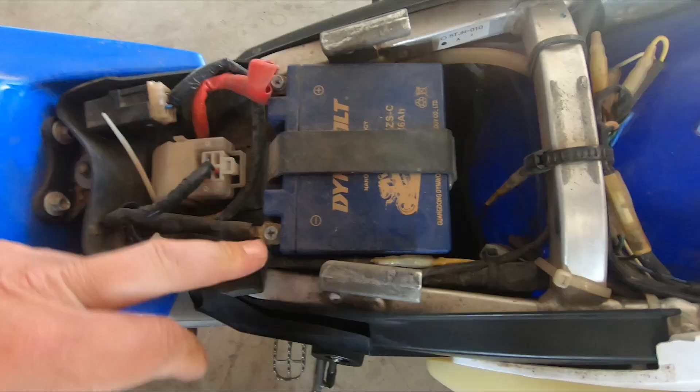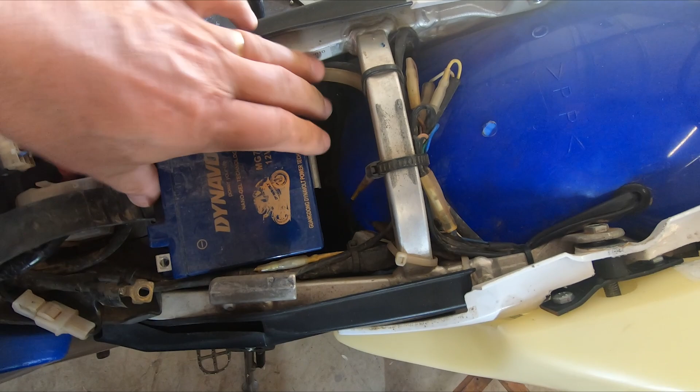And there's what I'm after - there's the lead acid battery I'm going to pull out. Have a look at the difference in size between those 2 batteries. There's the original lead acid, and there's the lithium. And the lithium battery is actually higher cold cranking amps than this little sucker.

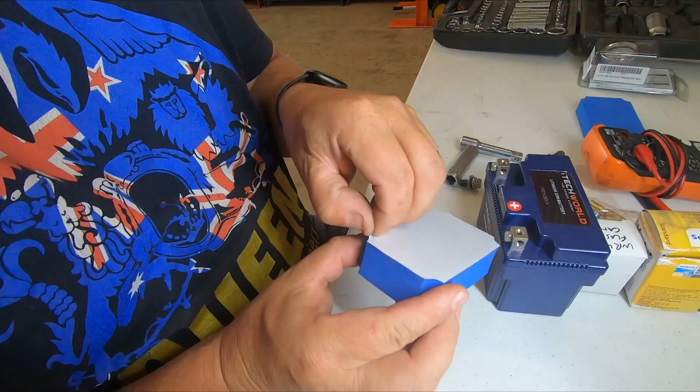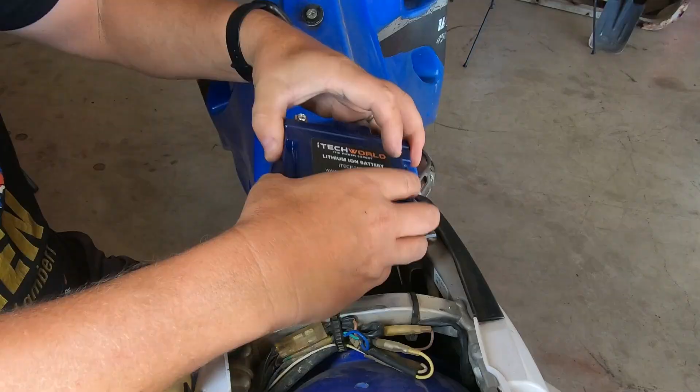What iTech do give you is these little pads to build out the battery, and when you do that, they're an identical size. So that's cool, that'll fit in the bike, no dramas with that little pad. Just like that, battery spacer fitted. Now we get our lithium battery with our little packer. Look at that, easy peasy. That's our positive terminal, negative terminal.

Done. Well, that was a pretty simple swap out. While I was in here, I decided to pull off the little fuse panel and just clean those contacts up a little bit and check each one of these fuses, hit them with a bit of contact cleaner.

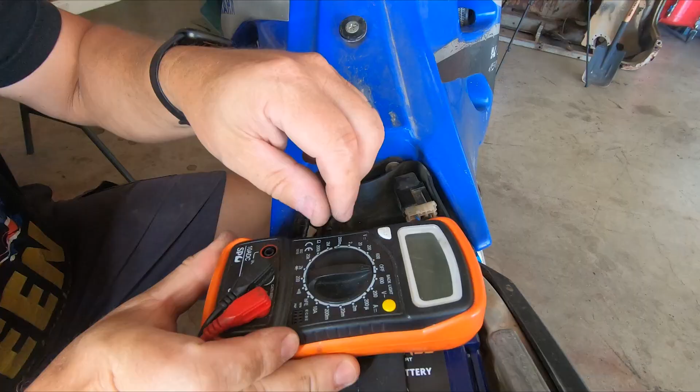All right, I got my multimeter here. I'll just put it on resistance, put it on the squealer, and test each one of these fuses. That one's good, that one's good.

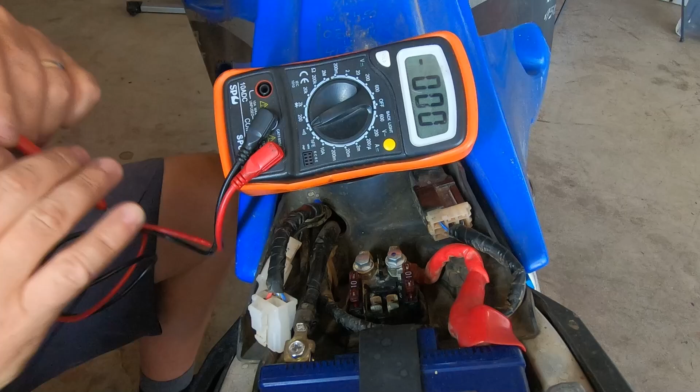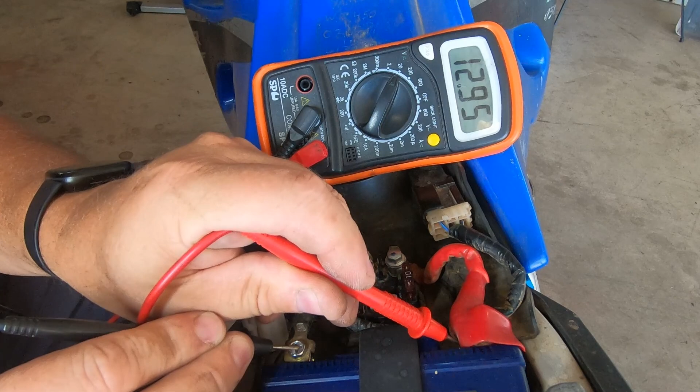While I'm here, I might as well test the voltage of this iTech battery. It should be 13 or close to it - it's brand spankers. 12.95, excellent. Okay, let me see how this thing turns over for starters.

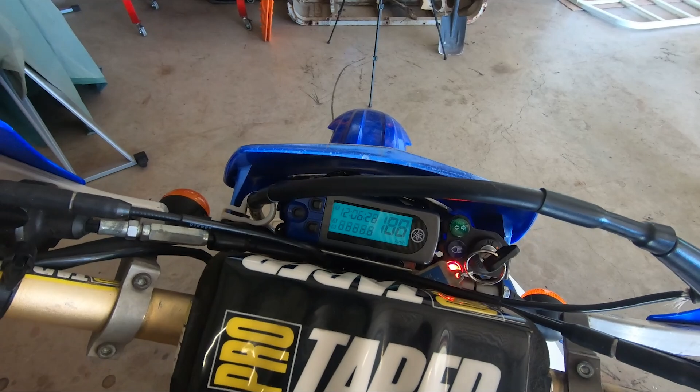Man, what a difference. All right, let's see what voltage we got going in - 13.05 at idle.

Well, after running that voltmeter on the battery, I had a look at the manual, and the specifications said that charging system should be running between 14 and 15 volts. So I thought there might be something a little bit suspicious there. I dropped the old battery back in, which was sitting at 12.3 volts, started it up, and it stayed at 12.3. So I've got a charging issue on this bike somewhere.

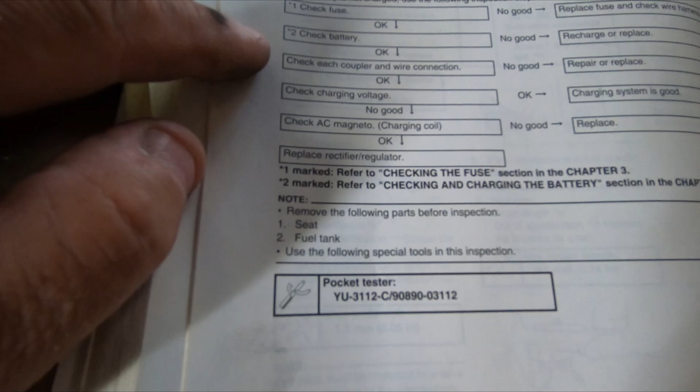All right, here's the charging system checks. First of all, check the fuse - I've done that, that's good. Check the battery - it's a brand spanker, so that's all good. Check each coupler and wire connection - I haven't done that yet, but I will. Check the charge voltage - that is no good. Check the AC magneto, and if that's no good, replace the rectifier.

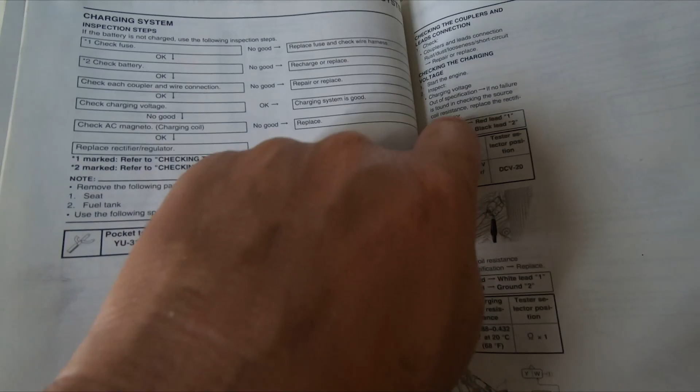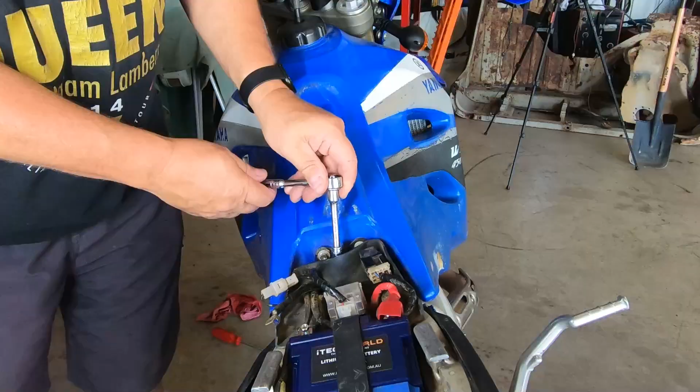And there's a procedure here for checking the AC magneto. Unfortunately for me to do that, I've got to pull the tank off, so that's where I'm going to next. So you got this big ass tank, and it's got 2 puny little 8mm bolts holding it on.

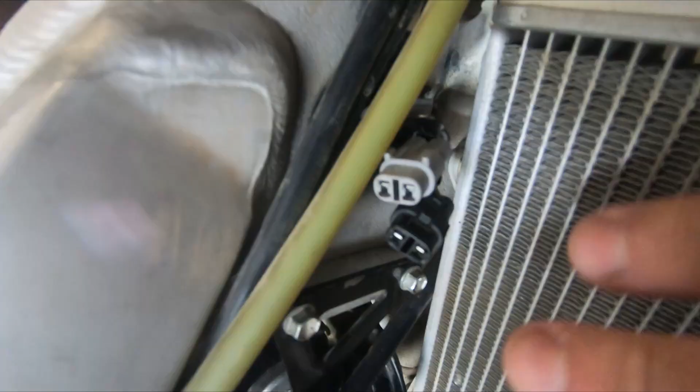Well, after a little bit of diagnostics, which basically involved testing the resistance at these 2 plugs, I have found out that my stator, located behind this cover, is dead. A stator is basically an alternator for a battery - it's the item that uses a moving magnetic field to create the electricity and charge for the bike. So I've got to pull this cover off and change that stator out.

To do that, the first thing I've got to do is drain the oil out of the bike. All right, the oil drain plug on these WRs is right there. I'll undo the filler plug so it doesn't gloop. Now I'll take this sucker off and try not to drop it into the drip tray.

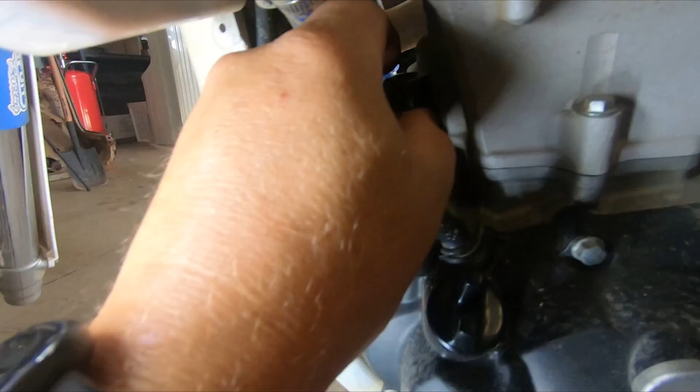Sweet. That seems to be running pretty slow, so let me take the dipstick out and let a little bit of air in that way.

Much better. Yamaha couldn't have extended that plug by another 2 or 3 millimeters just to clear this chassis, because when it drains, it runs in behind this weld and gets soaked inside of the chassis and then dribbles out here. I guess that's the difference between engineers and mechanics.

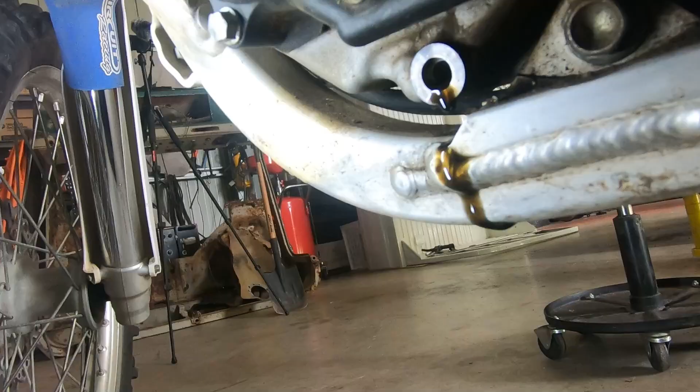That's a weird kind of phenomenon. A couple of these drops, if you watch them, they're actually not hitting the frame, they're flicking out. There's no wind to be blowing them. It's almost like a surface tension or a static electricity or something. It's really weird.

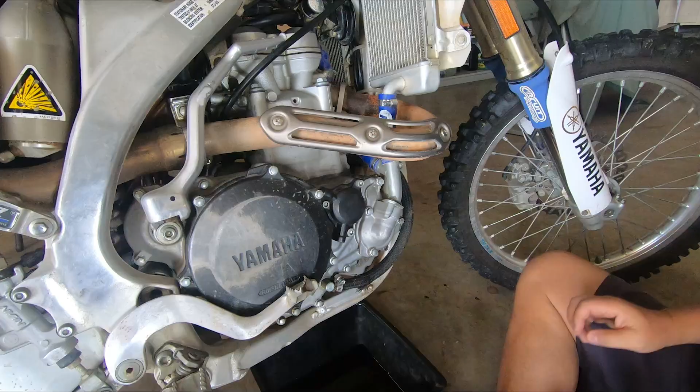I've never been more fascinated with an oil change. Now over on this side of the bike, behind this cover, is the oil filter.

My recollection of this is that all 3 of these bolts are different lengths, so you got to make sure you get the right bolt in the right hole. And my recollection was correct. There's just an O-ring here that seals it, and a couple of O-rings here where there's some oil galleries. And there's our oil filter.

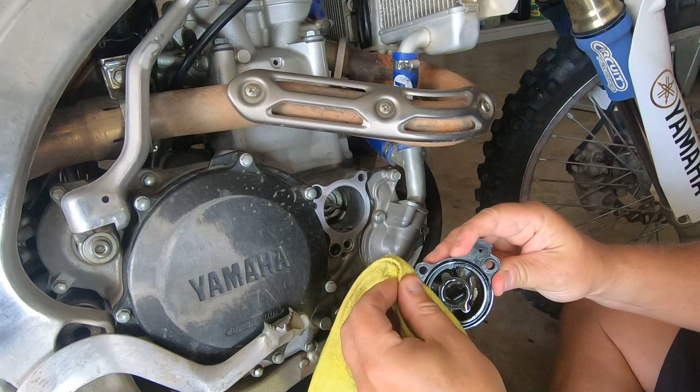Now I'll sop up the oil out of there as best I can, clean off that mating face, clean off the mating face on the cap. There's our new oil filter. Hello, little guy. Got a bit of oil on that mating surface and a little bit on that mating surface. Now you can't put this on backwards because there's a blank there. Won't fit, has to go that way.

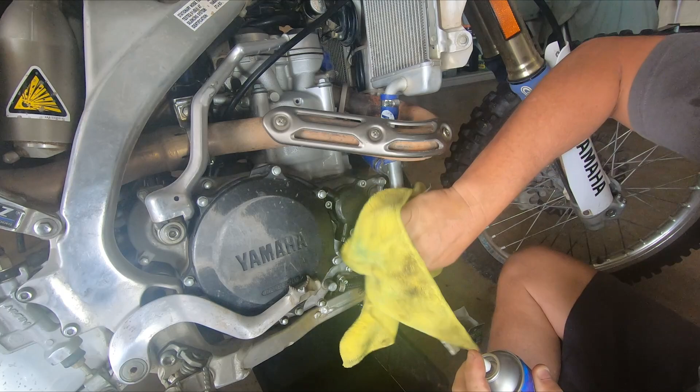Hit that with a pile of brake cleaner so it's nice and cleaned off, so if I've got a leak later on down the track, I can see it and it's not masked by the oil that I've already spilt when I was doing the change.

Now I'm back over the other side of the bike again, and I'll put this drain plug back in. There, that's pretty nice and clean.

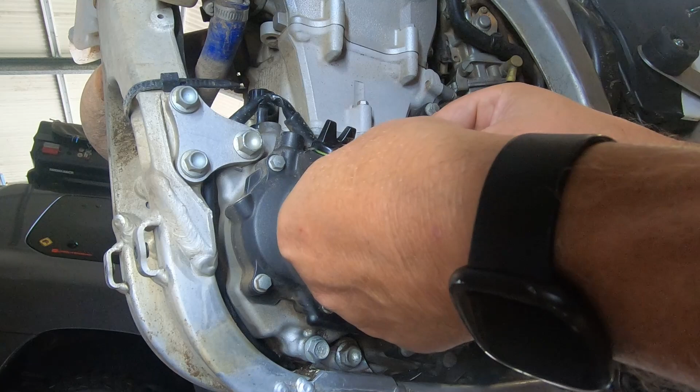I've got to leave this crankcase empty, but I do not want to forget to put oil in that when I'm finished. So I'm putting this little yellow reminder tag here to tell me, don't forget to fill me. It's pretty sad when you get to my age and you got to put these little reminders down for yourself. Got to accept my limitations and compensate.

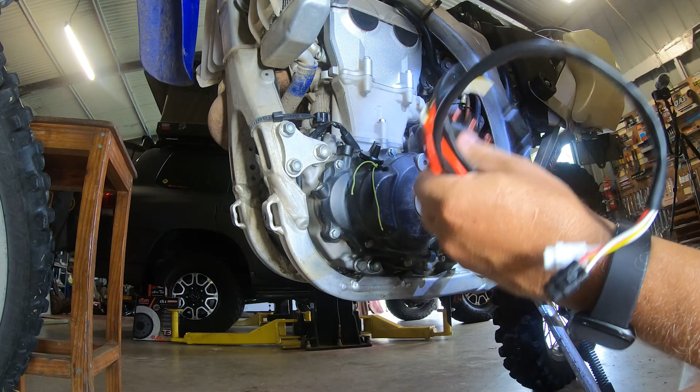The reason I need to do that is it's going to interfere with this cover here. I might just mark that spline so that I know where I took it off so I can put it back on the exact same spot.

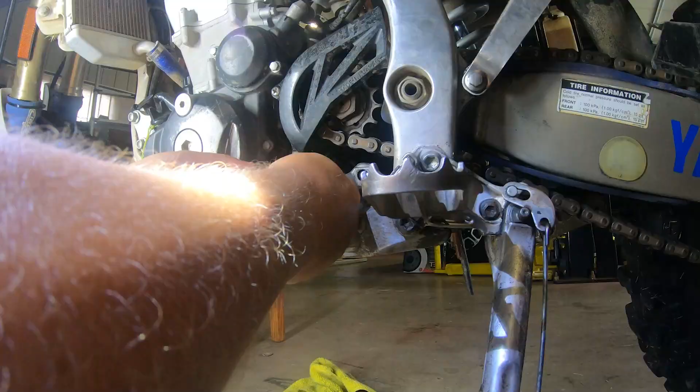Excellent. Now the next thing I've got to do is pull off this little breather. Now I pull the starter cover off.

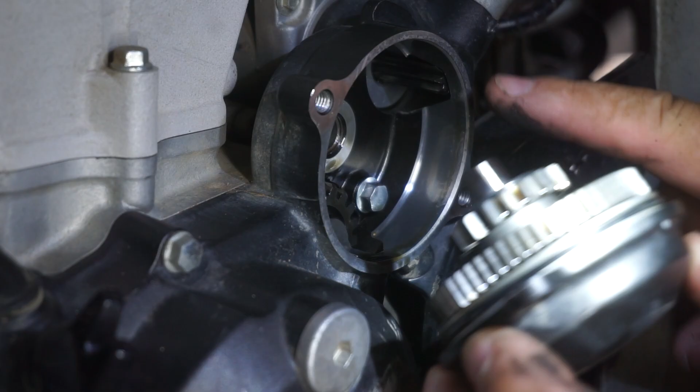So I guess that's just an intermediate gear. There's the starter gear there. Then you got this thing, and then you've got the gears here in the actual engine itself. So I guess the starter gear engages this guy, spins him around, and he turns him.

Cool. Okay, now I pull the rest of these bolts off. And they're not all the same length. So that one's the shortest one, and that guy there is the longest one.

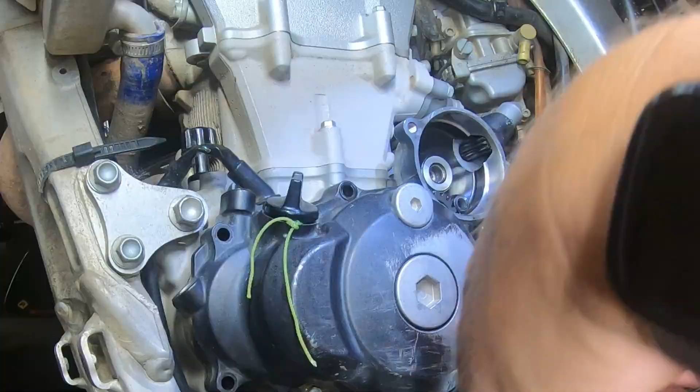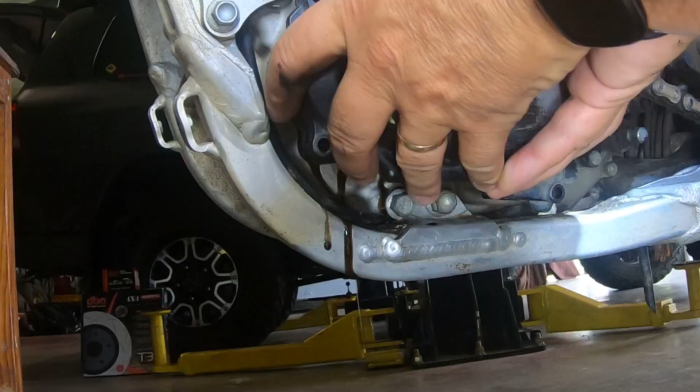So I'll just need to remember that, which I won't. So I'll mark them, put an L for that one, put an S for that one. Long and short for the geniuses out there. Look at that, I actually had a rag that was pretty close to being right in the right spot.

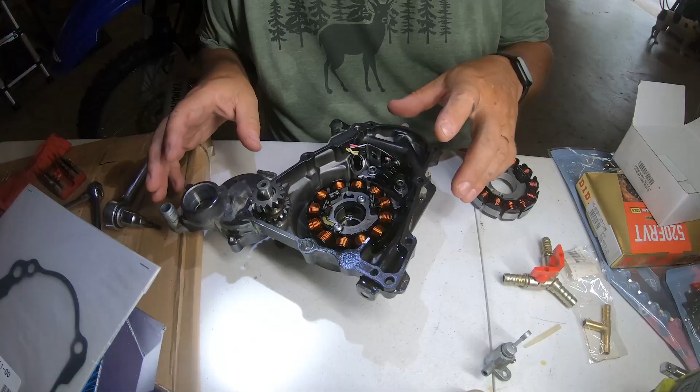There's what we're chasing right there, Mr. Stator. All right, now a couple of precautionary things before I rip this apart.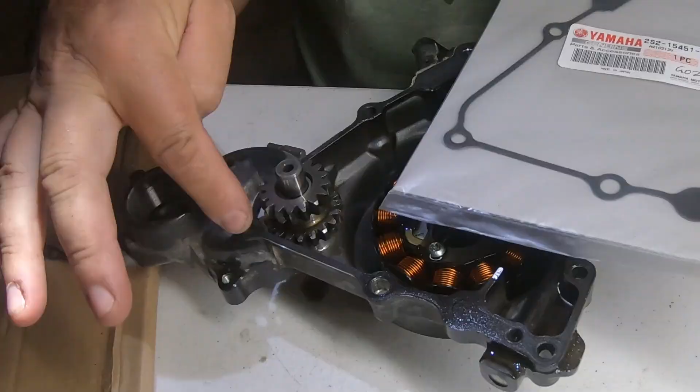There's my gasket that I got from Yamaha, there's the part number. I just want to make sure that that's going to fit. So that's got a little dog leg there, which is there, that runs around there. We've got a little flat square thing, which is that, and another tab there. Yep, that's the right gasket.

So I can pull that gasket off. It feels like it's got a bit of, it's like a steel reinforced gasket.

Next I'll check out the stator. Now I've already checked out these two plugs which match on the bike. So if I'm looking at this, it's got a little steel tab there, that's got that there. There are two plugs here, two here, big one here, big one there. That all looks good, same diameter.

That's our magnetic pickup, that looks about the same. And that's the little rubber plug that goes right there. So I'm going to call that a win in terms of a matchup. Not going to call it a win in terms of a solution yet.

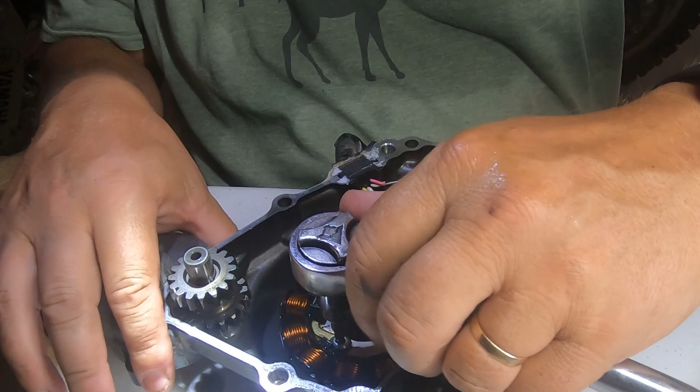Now there's two Torx bits holding that on, and those are T25s. And they're not held in there very tightly either.

I'm looking at those two Torx bolts. They're exactly the same. Now let's get this magnetic pickup off. That is held in place with two 5mm Allen head screws, and those two are identical lengths as well, so you can't mix them up.

Now I'd imagine this plug just levers out. Yes, we got a couple of pieces here. So we've got the magnetic pickup, which is underneath, and then we've got this little, must be a wire guard, which sits over top. Now the wire is fed between these two posts and goes directly in there.

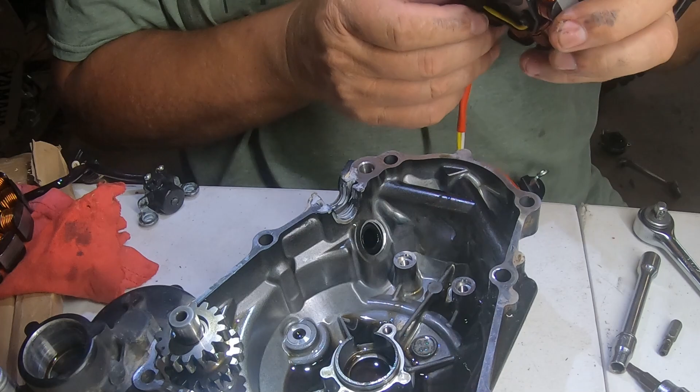So while that's all still fresh in my head, we'll get the new one straight away. That gets fed around the post like that. Then our magnetic pickup goes on those two posts, and then this wire protector.

Need hands of a 12-year-old for this. It's just running these Allen bolts down to hold it all in place.

Now let's bolt this stator in place. Okay, everything's sitting in place. Now the last thing I need to deal with is this little rubber plug which sits in there.

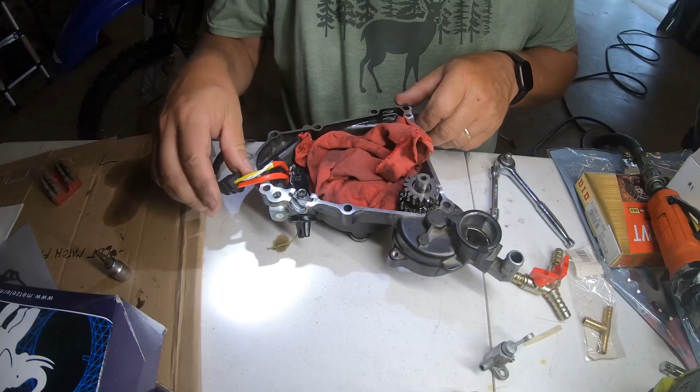But it looks like we've got some silicone on there, so I'm going to clean that up. I'm going to put a little bit of silicone on there myself as well. Now I put a rag in there so that I don't get crap sprayed everywhere. I've got a teeny tiny wire brush on my die grinder. I got it rotating so it's spinning all the stuff out that way, not in towards the cover.

Now I've got everything cleaned up. I'll run these bolts down tight now.

Now this little half moon sucker, I can see that giving me a little bit of grief because it sits a little bit proud of the mating face here, and the gasket has to sit over top of it.

Small amount on that surface, and then a small amount on the surface of the rubber plug itself. Now I will put a little small amount of sealant just on either side of that half moon because it is sitting a little bit proud of that gasket. I'll put a little bit of sealant on the top of that half moon where the gasket's going to sit up against it flush, like so.

Okay, I think we're ready to take that over to the bike now and fit her up. Okay, we'll put our gasket in place. There's a little O-ring there that the starter cover mates up against. I'll just put a little bit of oil on there to help facilitate assembly.

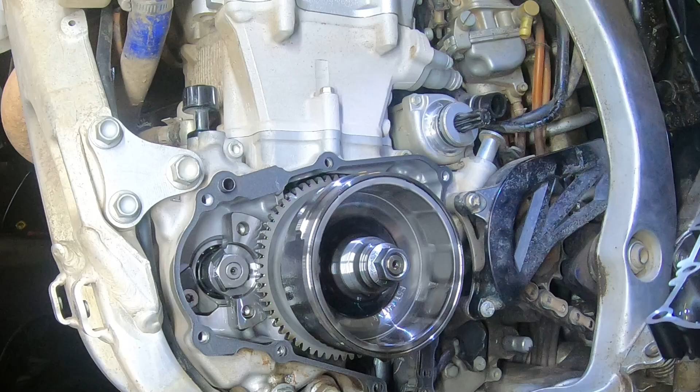Okie dokie, here we go. And then we've got locating dowels for the case itself. So how hard could this be, right? Short one goes there, and the long one goes here, and all the rest are the same size.

Okay, I have the starter cover in place. I've obviously got this cover completely put on. Now I'll put the shifter back on, top it up with oil, and before I route these plugs, I'll just plug them straight in, fire the bike up, and see whether we've got some charging happening.

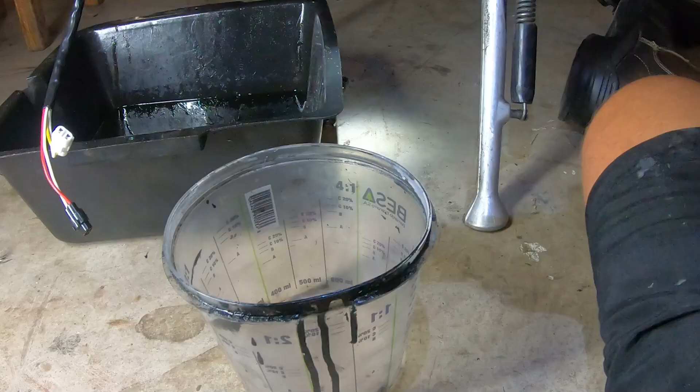Now I know the bike takes about 1.2 liters, so I'm going to actually measure that exact amount out, and then I'll dip it once I get the thing started, because you've got to actually dip it in the upright position.

Okay, it's the following morning, and it's mercifully cool in the shed here. It's probably only about 20 degrees. Got my side cover on. All the oil's cleaned off, so I'll be able to tell whether we got a leak there.

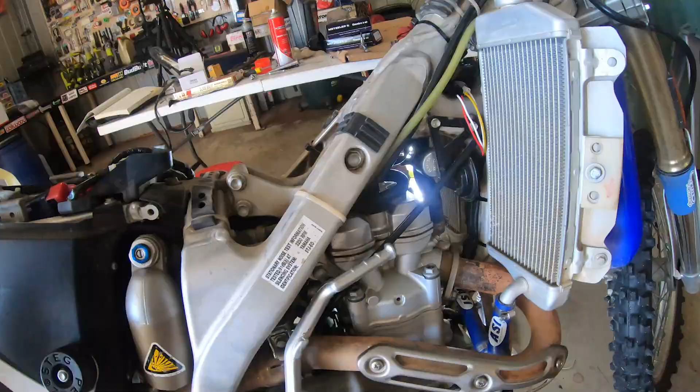I've topped up the oil with 1.2 liters. I've zip tied our cable in place. These are the two plugs for the stator. They're now plugged in. Now I'm just going to hop on the bike and kick it over without turning the ignition on, just to make sure that all the gears are meshing properly and that I haven't done something wrong behind that side cover where I might have one metal component contacting another in a bad way.

Good. No metal-to-metal contact there. Now I'm gonna set this fuel tank on just temporarily so that I can kick this thing in the guts and see whether our charge issue has been sorted out.

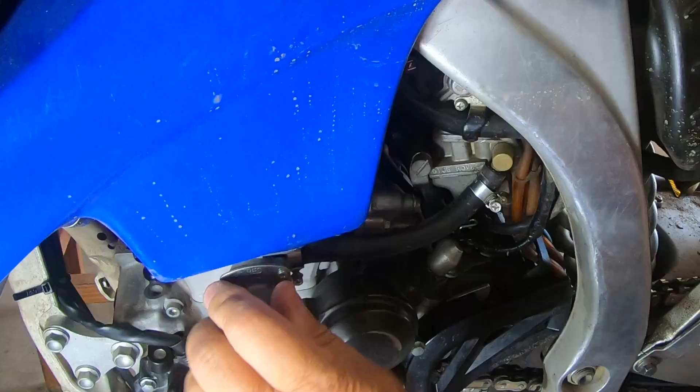You gonna leak on me without that clamp on there? It doesn't look like it. All right, moment of truth. Let's see whether this thing's charging.

Well, that isn't what I wanted to see. I was looking for between 14 and 15 volts. So I thought to myself, you've got a brand new lithium battery in there. Maybe the stator is reading that battery is full and just doesn't need to be charging it. So I'll put my old battery back in the bike, fire it up, and I'll see whether that changes the charging conditions at all. Fingers crossed, because if that doesn't work, I don't know where to go next.

All right, my old battery has got 12.89 volts in it. Let's kick this bike in the guts.

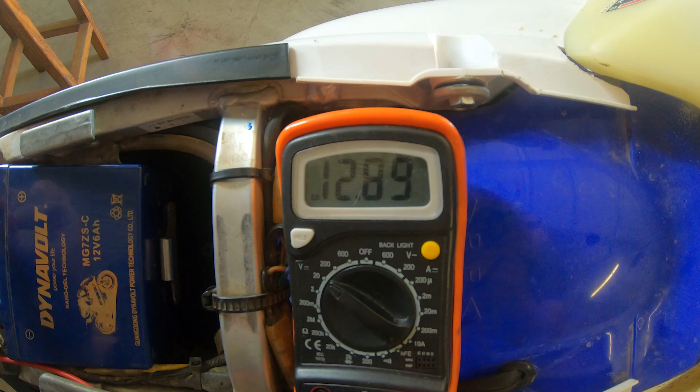Well, that's good to see. Obviously that lithium battery was completely topped up and the charging system was saying you don't need any more. We'll swap the lithium back in, call the charging system sorted, and move on to the next thing.

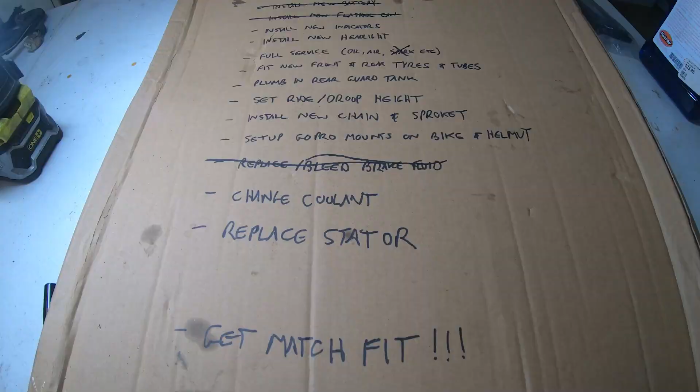Now, what was that next thing? Oh yeah, check the list. Now it's time to share in the wonderful experience of crossing something off the list. Did you feel that endorphin hit?

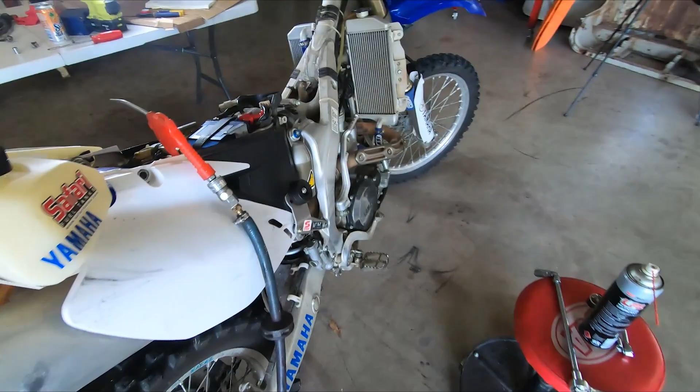You missed it? Let's try it again. Oh yeah, baby, now I've got no indicators. One reason is that one's melted off because of the tailpipe. But the second reason is the flasher can on these things just gets blasted to pieces with all the bumps and jumps you're doing. I don't know how many flasher cans I've replaced on this thing, but a crap load. Anyway, it's behind there, I'm going to dig that out and replace it.

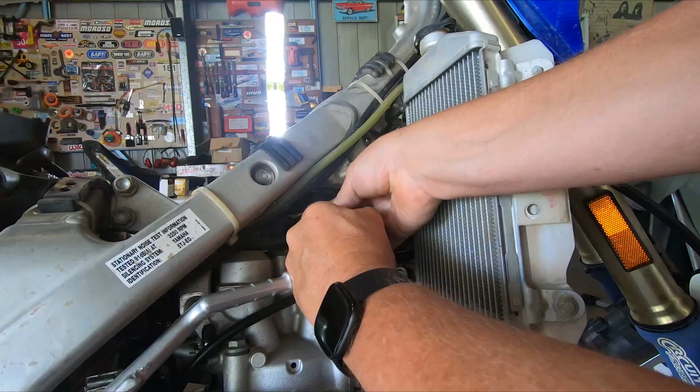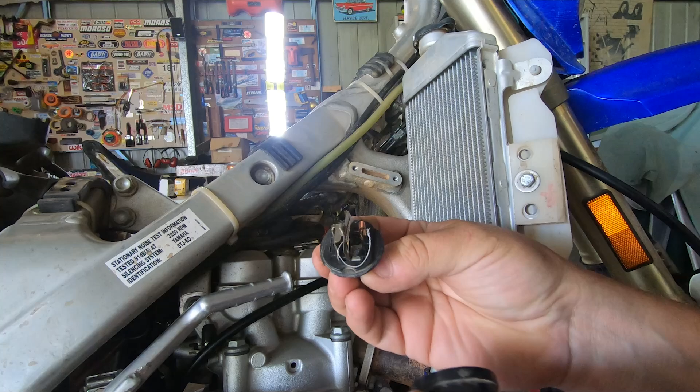And that's what this little flasher relay looks like. It's got such tiny little wires and little bits and pieces that they just get smashed to bits and stop working. Not that I'm going to be using the indicators out in the middle of the Simpson, but anyway.

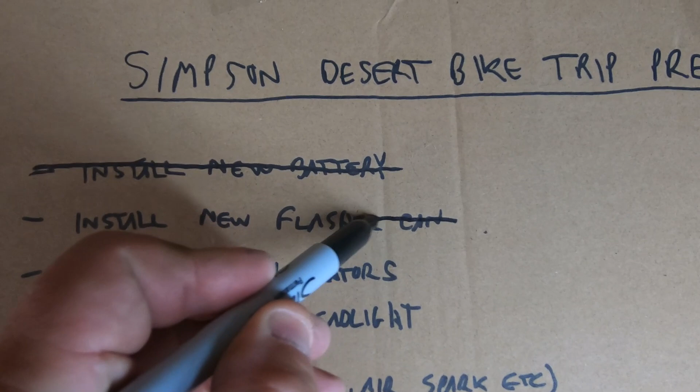Now to bleed the brakes. And that's what I'm chasing right there, that brake bleeder screw. Okay, got a little bit of hose, we'll pop it on the bleeder. I got a little container to catch the brake fluid in.

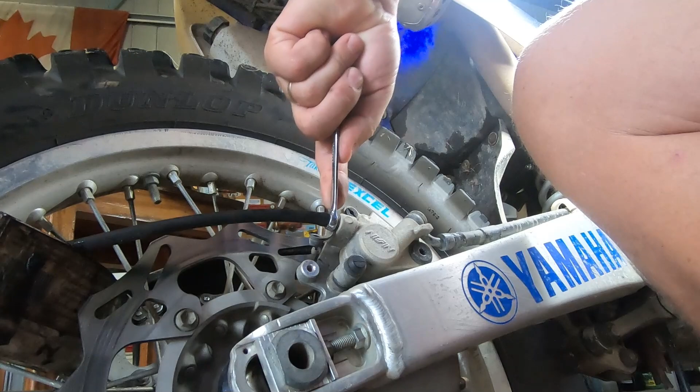Now there's two separate reservoirs for the front and rear brakes, and this one here is for the rear brakes. Let's bleed away. So I'm pushing the brake pedal down, letting her back up, pushing it down, letting her back up. That's it, she's quite full.

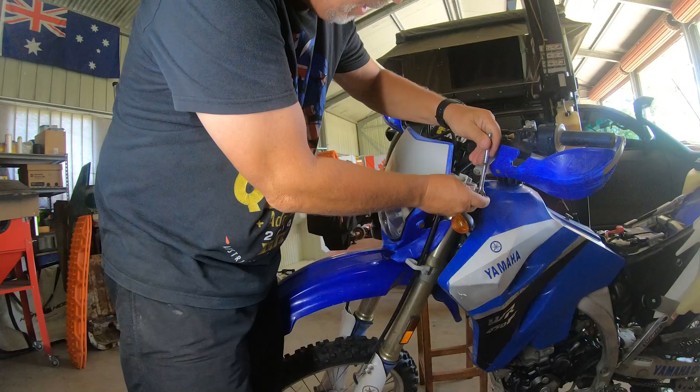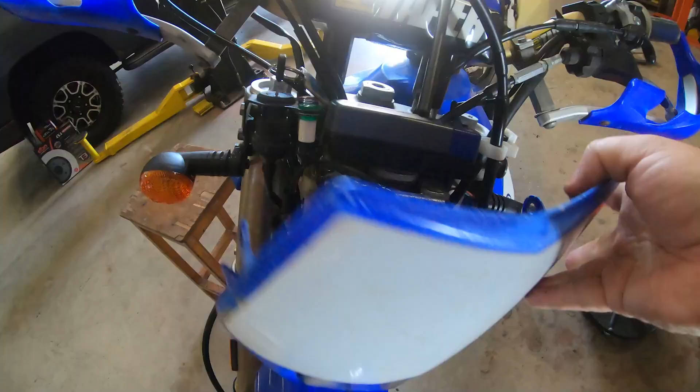Now it's time to change the headlight because the one in there is burnt out at the moment, and I'm going to share with you something I would not recommend you do. Okay, there's our headlight we're going to pull out. See that little sucker? That is an LED bulb, and it cannot take the flogging that a motocross bike gives it. I would not use LED bulbs, especially these cheap Chinese jobbos off eBay. So I'm going to put the original H4 back in.

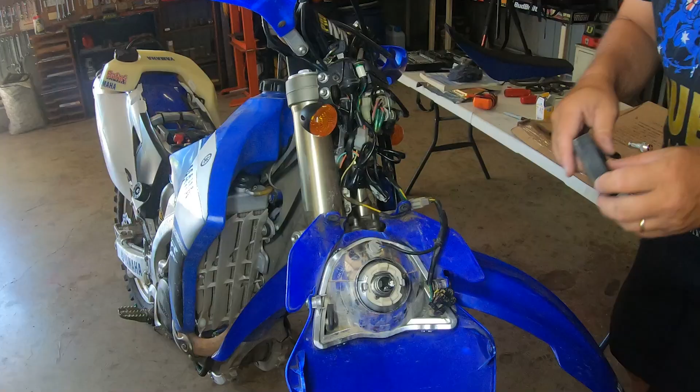All right, let's fire them up, see what we got. Sweet.

Now this little park light guy, he's not working. Let's see if I've got a spare one. I could not get that little running light bulb to work. I've cleaned all the connectors in there, I've cleaned all the contacts, and I just cannot get that sucker to work. So I'm going to raise the white flag.

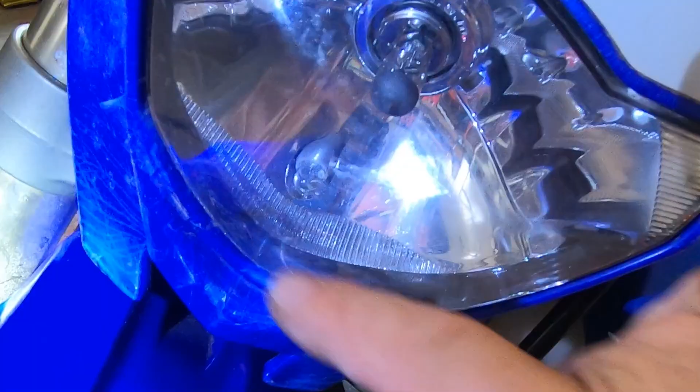You win, Mr. Bulb. Next, I'm going to the back of the bike to replace this mangled indicator. Looks like bloody Terminator 2 action happening there.

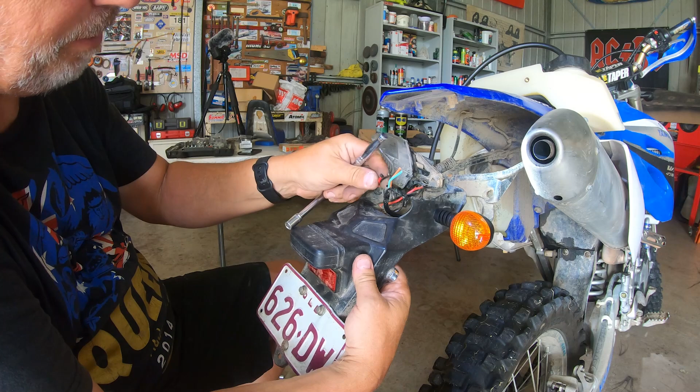All right, new indicators bolted in place. Now I just need to solder it up like so, and we're good to go. Put a little bit of heat shrink on these.

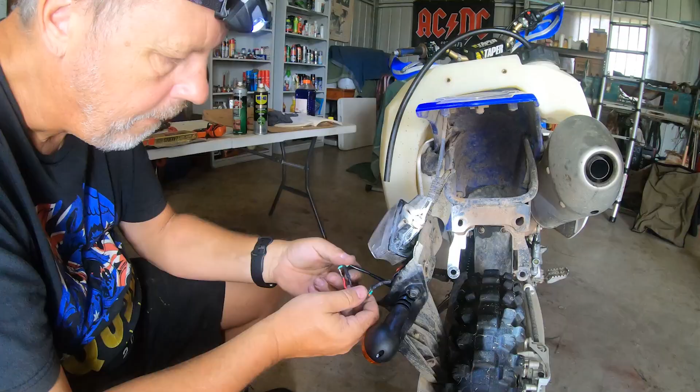That's an example of one of the instances when you try and cut corners and it bites your ass. I used a torch on that to speed things along a little bit, and I should have used a soldering iron, because if I had, that heat shrink wouldn't have shrunk up on me.

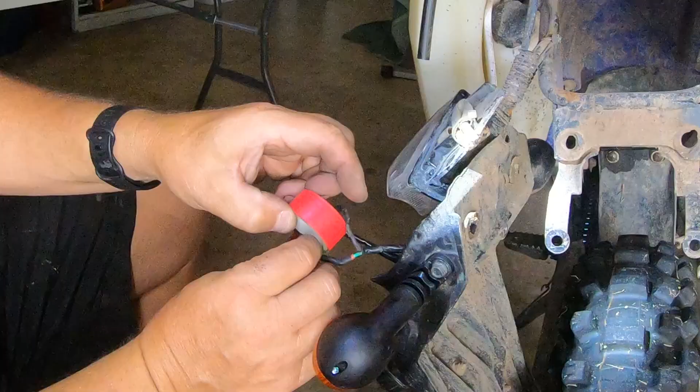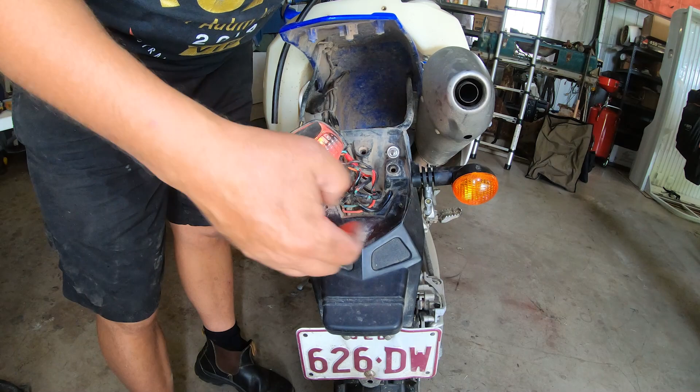Now before I put this brake light in and bolt everything back up again, I'm going to check that indicator works. Awesome! Goodbye T2, it was nice knowing ya.

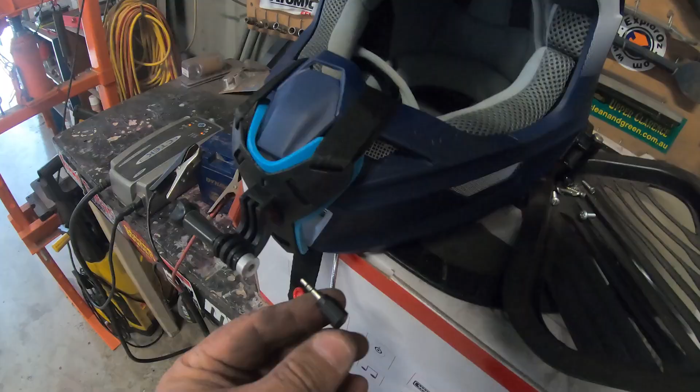Alright, this one: set up GoPro mounts on bike and helmet. Got the helmet GoPro mount all set up. I like it sitting out here better than on the side or top, because you get the brim of the helmet or the side of the helmet blocking it when it's sitting over there. I've got an internal mic all set up, got that idea off Scott from Man Bike Swag, so thank you for that, Scott.

I got a GoPro mount on the bar here, and to be honest, for the rest of the bike I just use a little bit of duct tape or electrical tape. For example, the last time I was out in the desert, I actually duct taped the GoPro to my boot, and that was on the sequence where I hit that dingo out near Purni Bore. Endorphin release time.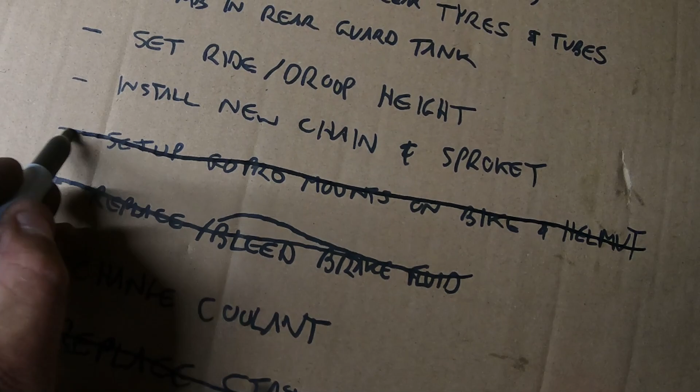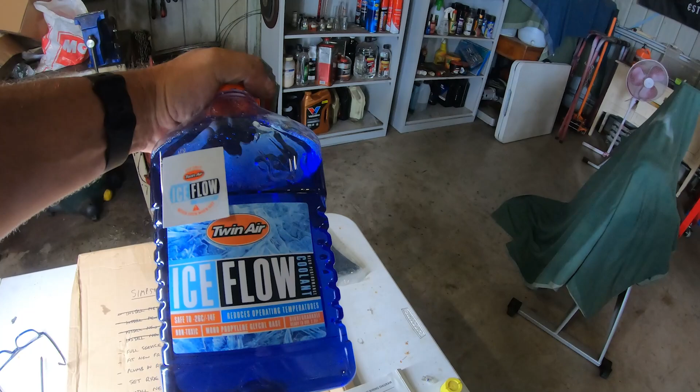Yes, okay, I'm going to move on to change the coolant. Got myself some brand new coolant here, so I'll drain the old stuff out of the bike and top it up with the new stuff. I'm not going to do a flush on this because I do change the coolant quite regularly on this bike.

Okay, this little puppy here is our coolant drain plug, and talk about easy to get to. That's bloody awesome.

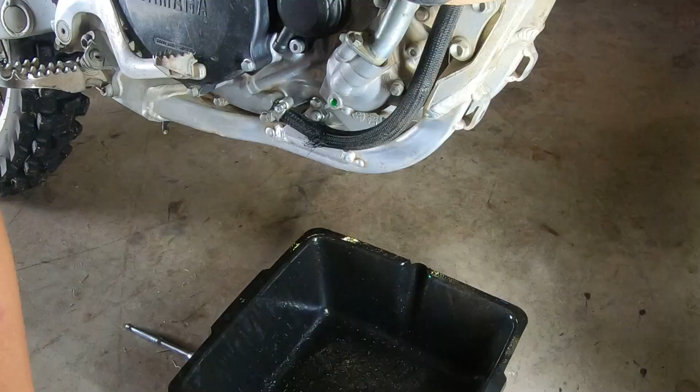And what do you know, I spilled some. How about that? That never happens.

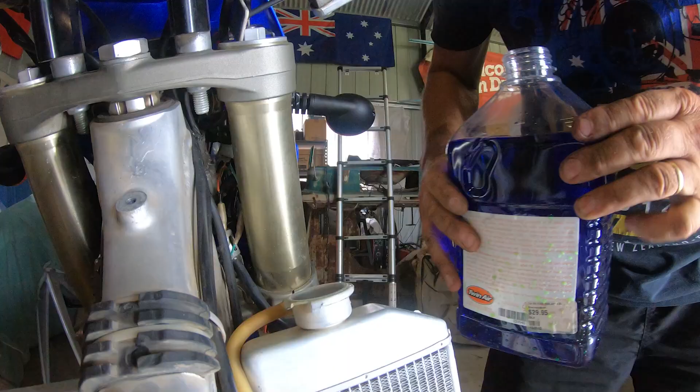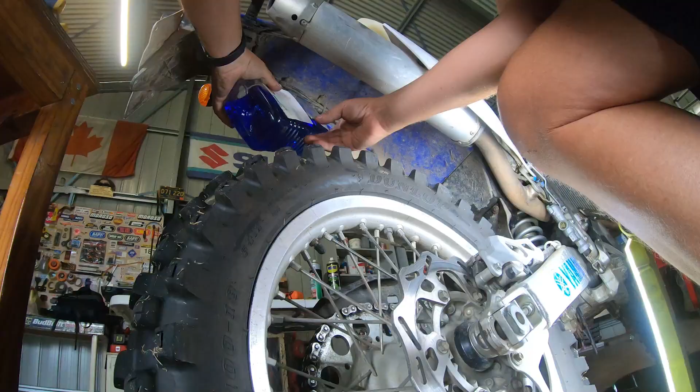And that is my coolant flush. Put my little drain plug back in, tighten him down nice and tight. Now I'll top the radiators up completely, and I'll put a little bit of coolant in the overflow bottle as well. Now I'll put the tank back on, run the motor, get it hot, and then check it once it cools down. Not too dissimilar from a car, really.

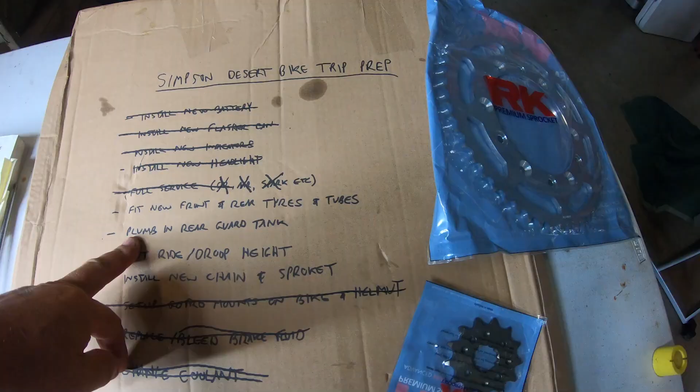Time for that endorphin hit. Oh yeah, baby. Plumbing in the rear tank. Let's have a look at what I'm talking about there.

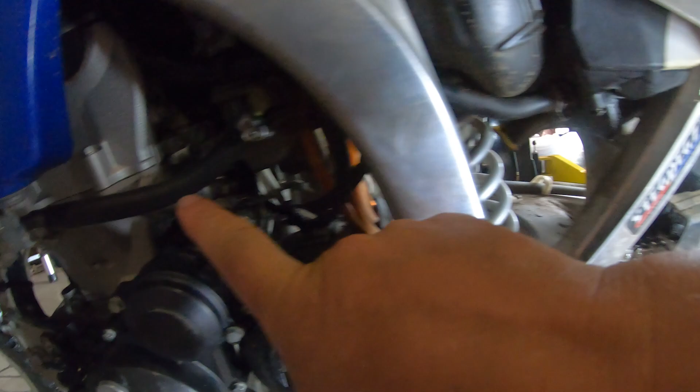This 5-liter tank here is not plumbed in at the moment, it's just sitting there. So basically what I've got to do is get a fuel line from here, over to here, and tee it into the main fuel line. I've got an on-off valve, I've got a T, I just need some 5/16 fuel line. Shops are closed today, so I'm not going to be able to do that, but it's a really simple job, and I'm not even going to bother filming that one.

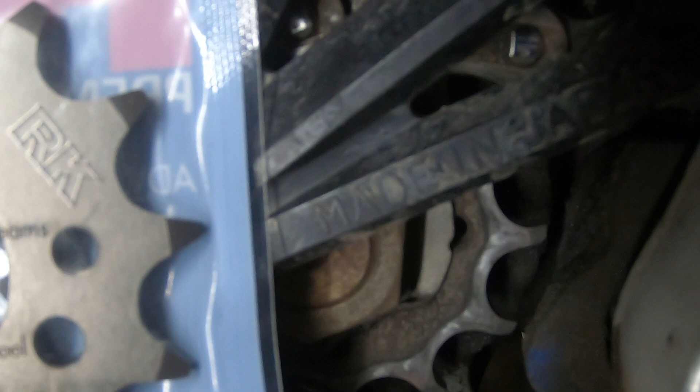This item here, install new chain and sprocket. Got a brand new chain, a brand new front sprocket, and a brand new rear sprocket. Just to compare the sprocket on my bike to the brand new ones, you can see how it's worn - it's actually a little bit more pointy, and the very tips of those sprockets are pulled a bit over towards the front of the bike. So a new sprocket is in order, and I'm not one for just changing one sprocket, so I'll do my rear sprocket as well, and I'll do my chain as well.

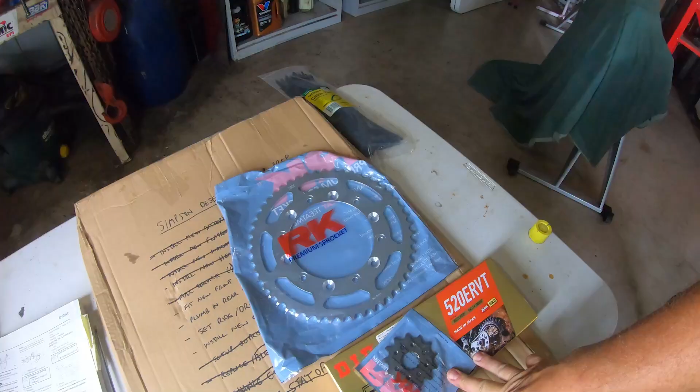Now we're 3 months out from the desert trip, so I'm going to run this old gear for probably a couple more months before I swap this new gear on, because I want the brand new stuff on when I hit the desert sands. I will install this kit about a month out, because one thing about brand new chains is they stretch, and they stretch quite a bit for the first part of their life. So I'd like to get that stretch out of the chain before I actually hit the desert.

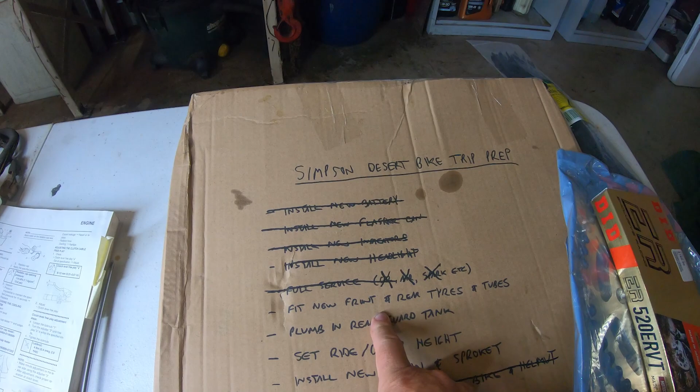Fitting brand new front and rear tires and tubes. Again, I'm not going to do that until just before we leave. I want to hit the desert with brand spanking new knobbies.

Set the droop height - I've actually checked that, and it's pretty good. That's the droop that the bike sits at when it's just sitting here idle. And if I lift the bike up, it's actually got no droop whatsoever, but it's right on the very limit of drooping, which is what I'd like to see. So we'll call that one a win.

Endorphin time again. Oh, baby.

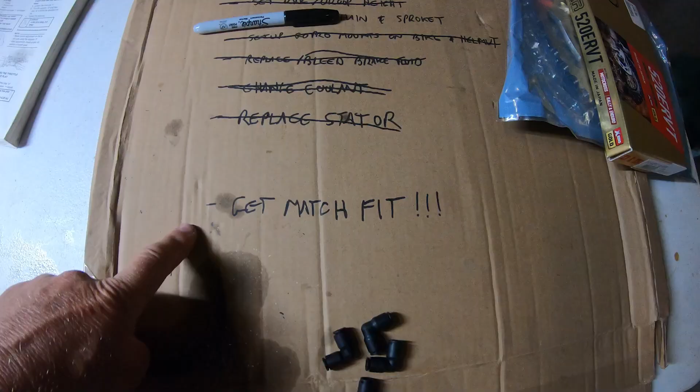The last item on my list here is Get Match Fit. Now, what exactly does that mean? Well, I'm pretty lucky in that I've done the desert crossing 2 times on my motorbike so far, so I've got an idea of what I'm in store for, and I know which parts of my body were killing me out there last time. The first thing for me is my hands, right here and right here, because when I'm riding, I'm standing up and I tend to grip quite hard on the handlebars, probably because I'm scared shitless and hanging on for dear life.

So what I do every evening is I've got these little babies here, and I just sit and squeeze away for hours and hours, trying to build a little bit of fitness up on those arms. Of course, the other thing I do when I'm out riding is try to consciously remember to loosen my grip, because the handlebars should just basically be flopping in your hands - you shouldn't have to grip them so hard that your arms get sore. But anyway, that's one of the challenges I've got.

But far and away, the biggest thing is fitness level. We'll be on the bikes from probably 8 or 9 in the morning until 3 or 4 in the afternoon, and 99.9% of the time you're standing up on the pegs. We're out there to have a good time, we're out there to have fun. It's a giant sandbox and we're out there to play in it. I do not want to be in a position where I'm riding to survive - I want to ride to have fun. And because of that, I need to be a lot more fit than I am at the moment.